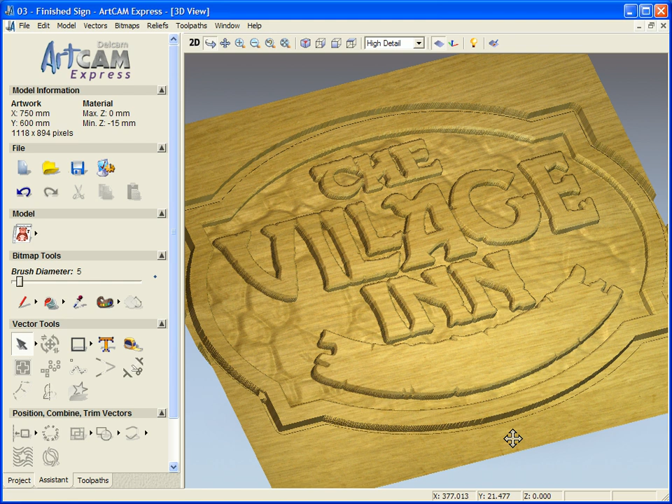In this demonstration, we will see how to create this three-dimensional sign using ArtCAM Express.

When creating a design, it's a good start to work from an image or a sketch. The next step would be to create the vectors, but in this case we're going to import them.

There are a variety of different ways within ArtCAM Express to import vectors. The easiest way is using the vector library, within which we supply a whole range of different vectors and samples.

You can also quite easily and quickly create vectors within ArtCAM Express using any of the vector creation tools. In this case, we're going to import vectors.

We can actually see the different file types that ArtCAM Express supports. So we can see here we have Illustrator, EPS files, DXF, DWG, a whole variety of standard file formats.

We're now going to open the Village Inn DXF. So as we can see here, we have our text vectors and our two individual borders.

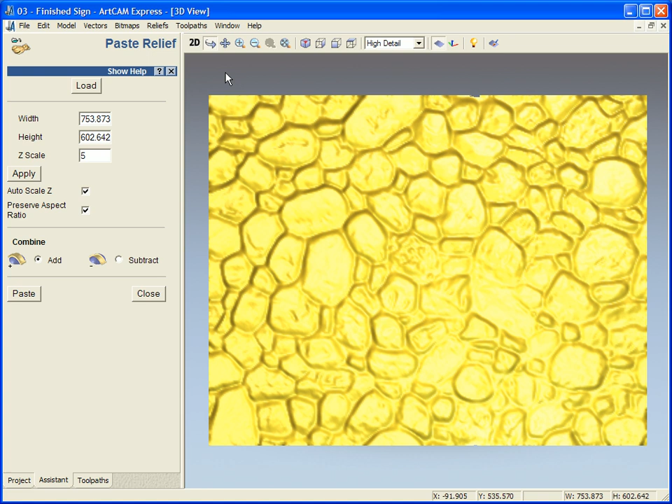ArtCAM Express also supports 3D models, so we can import a variety of 3D surface and solid models.

The next stage is for me to create some machining boundaries. So I'm going to select my text and my border and offset these inwards, then group these together. We'll see where they come in useful in a moment. We're just going to do the same again, and group these together.

Now we're going to use this boundary here to actually machine away the unwanted texture.

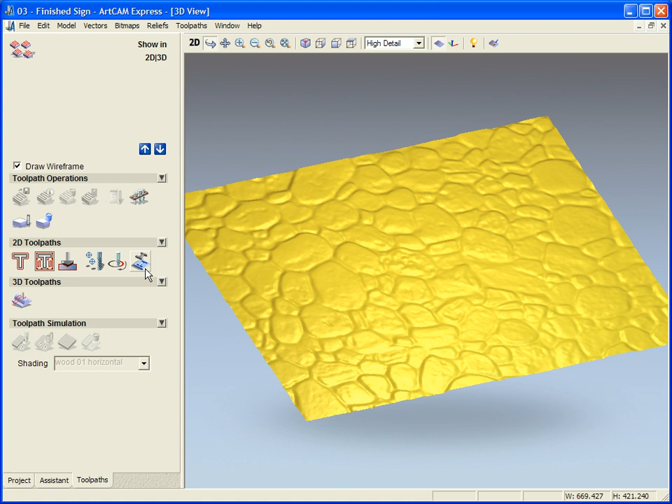In our toolpaths tab, we have a wide range of 2D toolpaths and also one 3D machine relief toolpath, giving us the ability to machine 3D models. So first of all, we're setting up our material block.

Using the selected vector and ArtCAM Express's tool database, which is available in metric and inches, you have both options there. You also have preset tools with speeds and feeds relevant to the material you're cutting.

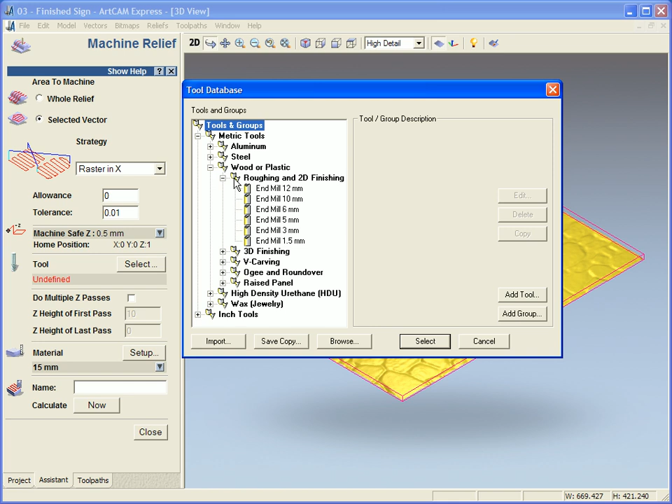So for this one, we're going to go for a 6mm ball nose. Now this is what a ball nose looks like. We're just going to leave all the standard speeds and feeds within this.

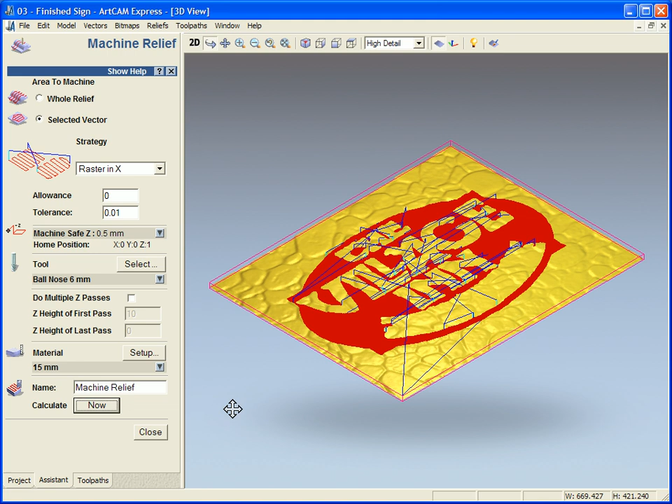Now we can see it's actually machining the area we want to keep. To view this better, we can simulate exactly what the piece will look like using that toolpath.

Now you can see that the text has been raised. We've got the nice 3D texture underneath this.

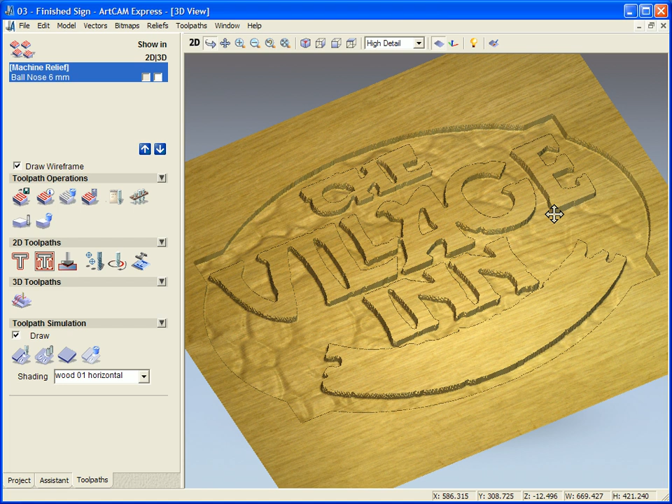Now, using those other boundaries, we're going to put a chamfer around the text and around this inner border. So we're going to select these areas here using the 2D toolpath V-bit carving option.

We're going to select one of the V-bit carving tools. Now if we just view to see exactly what a V-bit carving tool looks like, as we can see it comes to a sharp point at the end.

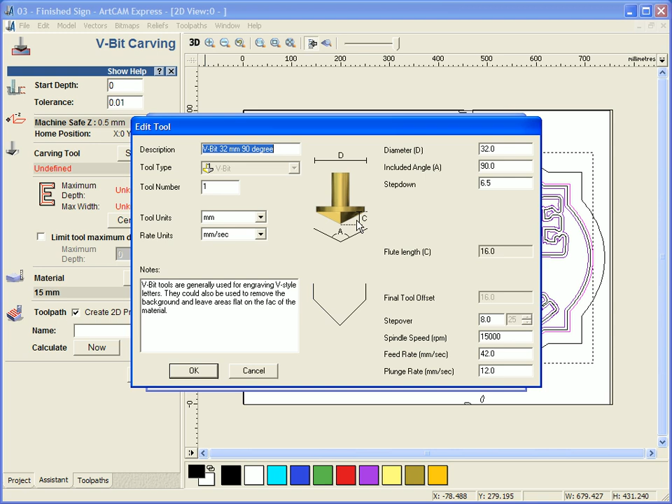And we're actually just going to machine between these lines that we've selected.

When this is done, we should see a lot more definition around especially the smaller letters. Also, we'll see some around the larger letters as well.

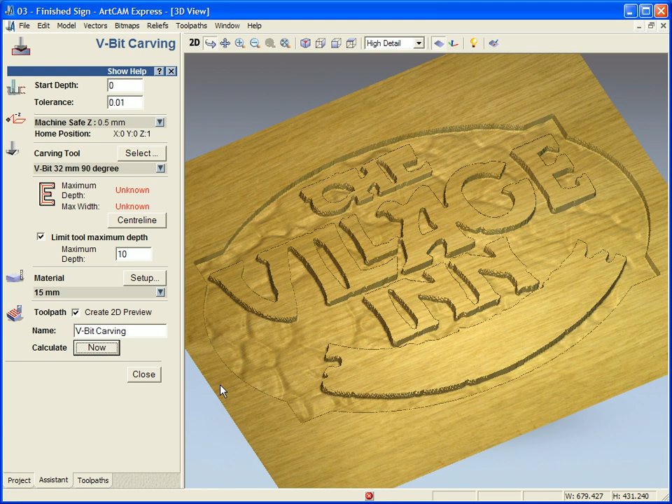So again, we're going to simulate this to view exactly what it looks like. Now we're able to see the nice chamfer that has been put around our text and our border, and much cleaner visibility on the letters themselves on the top.

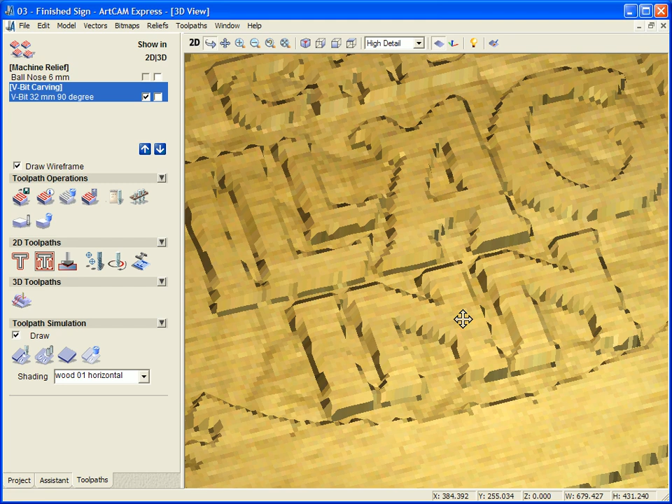Now to finish this sign off, we're just going to cut the sign out. To do this, we're going to use one of the other tools, which is the profiling tool. It automatically gives us our thickness, and we're going to select a nice big tool to cut the model out.

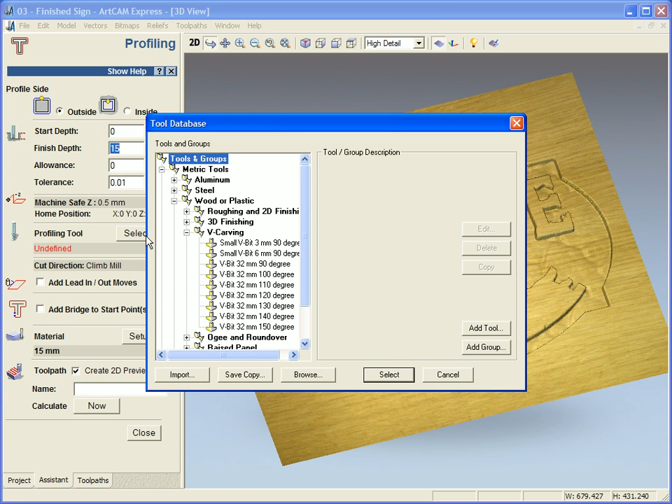This time we're going to use bridges. Bridges, or tabs, are used to actually hold the model in place within the material block.

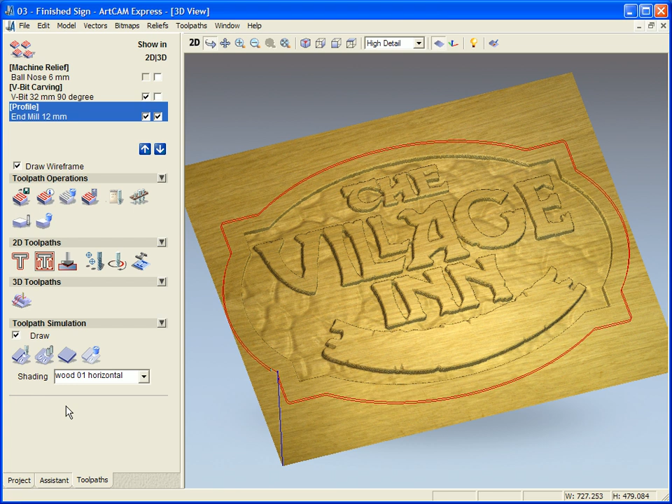This is what it looks like. So we can see in the bottom left hand corner we have our bridge, or tab, there.

We've seen quite easily and quickly, using three toolpaths and three separate tools, that we've created a very nice, effective looking three-dimensional sign using ArtCAM Express.